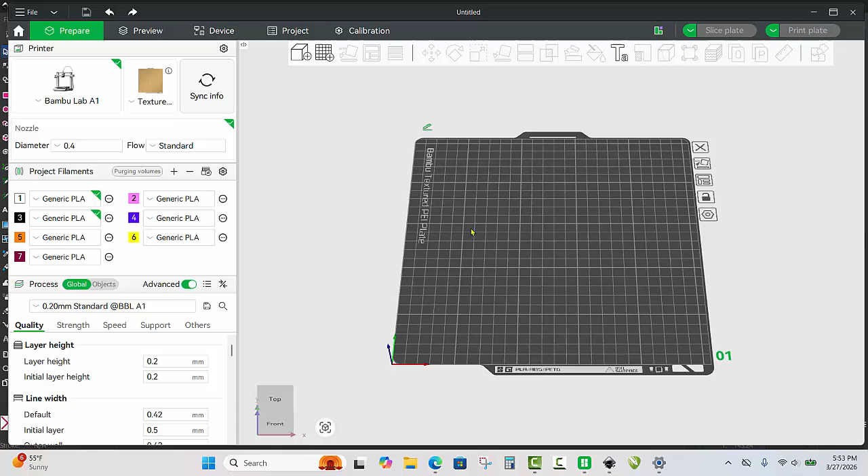All right guys, we are in the mystical, magical Bambu Studio Slicer. Now what I'm going to show you in this video is not exclusive to Bambu. If you're using Cura or Prusa or Orca or Creality Print, whatever, all the slicers work about the same way. So we are going to be importing an SVG file that we created in Inkscape and turning it into a 3D model quick.

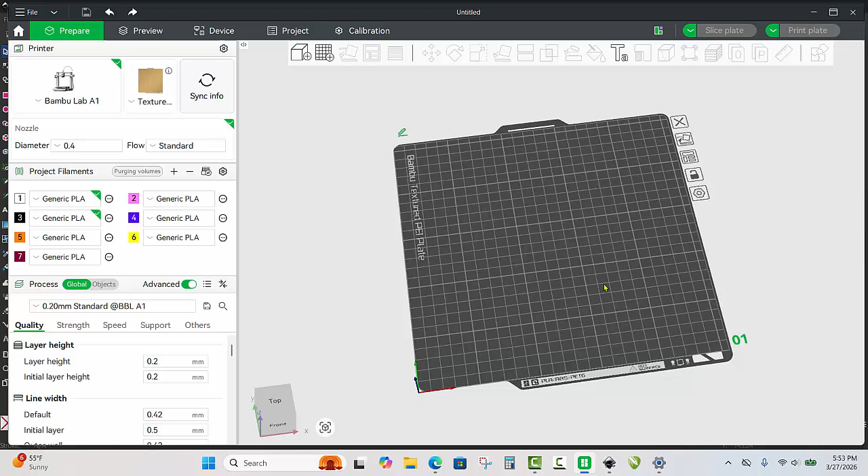Let me show you how it works. We hit Control I here in Bambu Studio. We go to our desktop. We find our file that we just created. Where is it? Hummer Keychain. There we go, there's our Hummer Keychain.

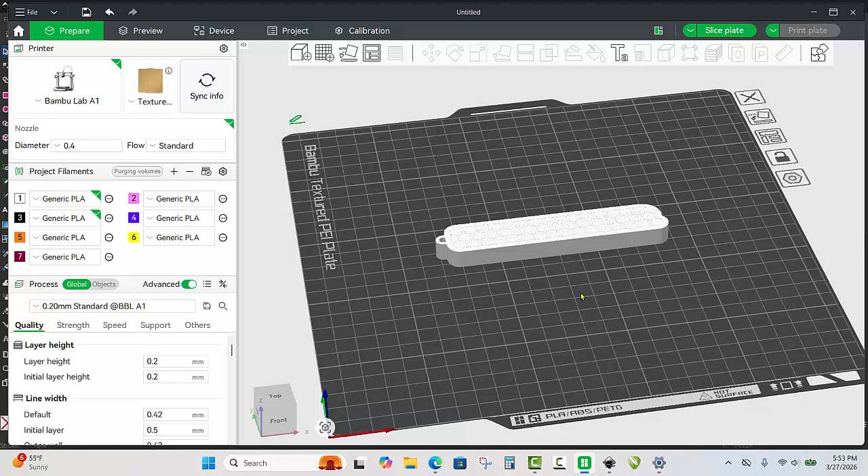Now it's going to come in all one color, which is pretty awesome. It's going to come in 10 millimeters thick, which is pretty awesome. And what we're going to do is we're going to go through and set all these pieces up and turn it into a 3D model lickety-split. All right, so let's go to the Objects tab.

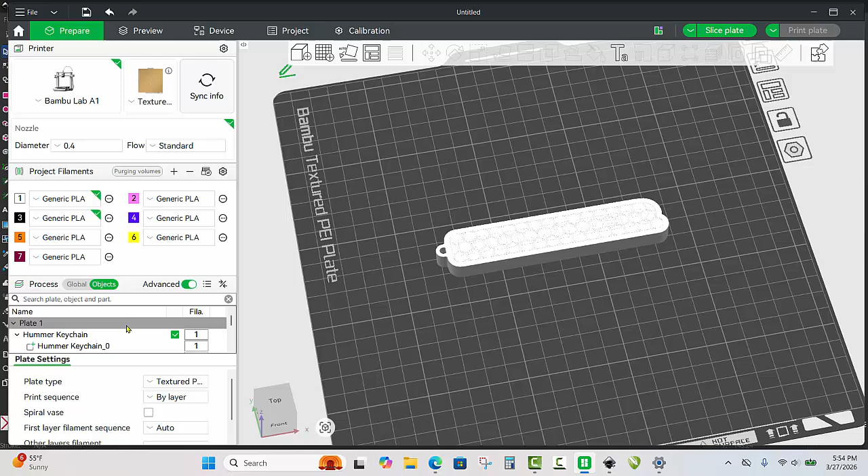Now we know in our design we just have black and white, so we've got that pretty well covered, right? So that first object, this is the part where we have to use our brains and say, well, what is it exactly we want to do? So we have to have a good idea of what we want to do. But the first object is called backplate. Okay, boom. And how thick do we want our backplate?

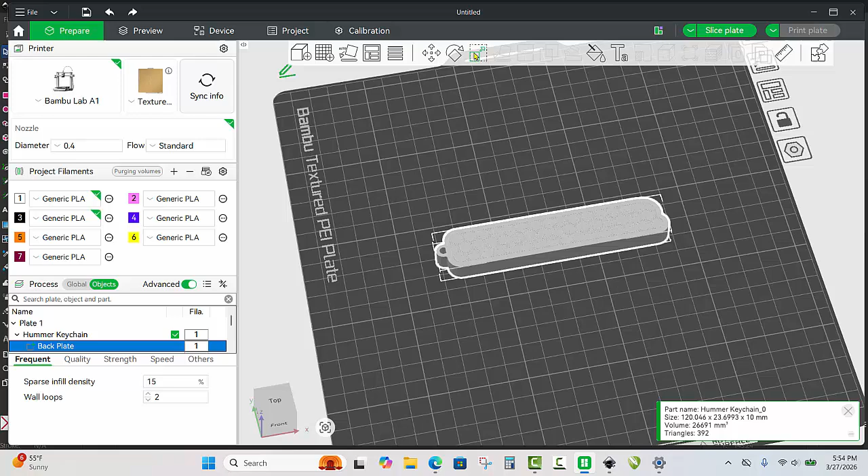Well, I'm going to turn off uniform scale. We want our backplate, in my opinion, 2 millimeters. You'll see if that's good or bad here in just a moment. It is going to be white, so we're good to go there.

Now the next piece is our border. Okay, and I'm going to say 3. I don't know exactly how thick we are actually going to do it, but let's just say 3. And the border is going to be white as well. So we can call this border, just go ahead and click on it and rename it border.

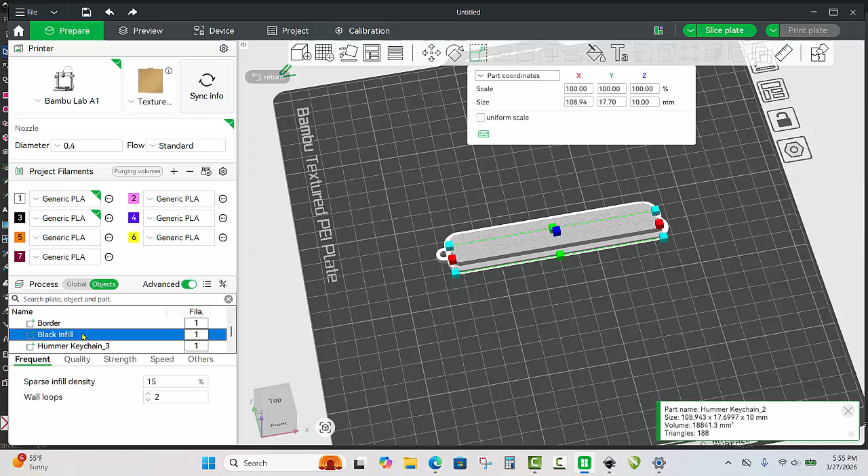Okay, and then the next thing that we have is our infill. Now the infill is going to be, so let's call it black infill. Okay, and that is going to be probably only 1 millimeter. Again, I don't really know, but let's just call it that. And then for our text and the black infill is in fact going to be black.

And then our next part is the honeycomb. So there's the honeycomb. Boom, and it's going to be black. So I hit 3 on my keyboard. Why 3? Well, because that's the third defined filament color. And then its thickness, I don't know, let's just do 1 for funsies.

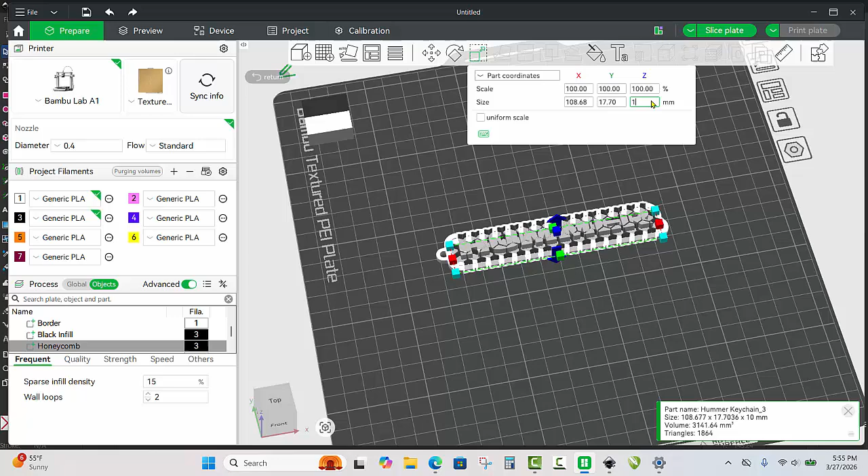And then finally we have our Hummer keychain text. So there's Hummer, it is going to be white. And let's make it 2. Let's make it pop goes weasel. Okay, we're going to make it just a little bit thicker. Now this is what we got.

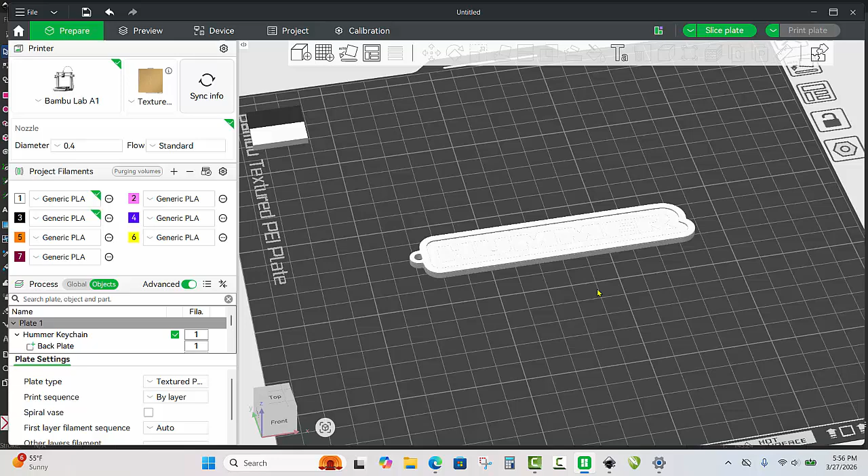A big old mess. So we have to figure out exactly how this is all going to work in regards to your Z heights. So you really have to know what you're making in order to be able to create the model for it. So understand this.

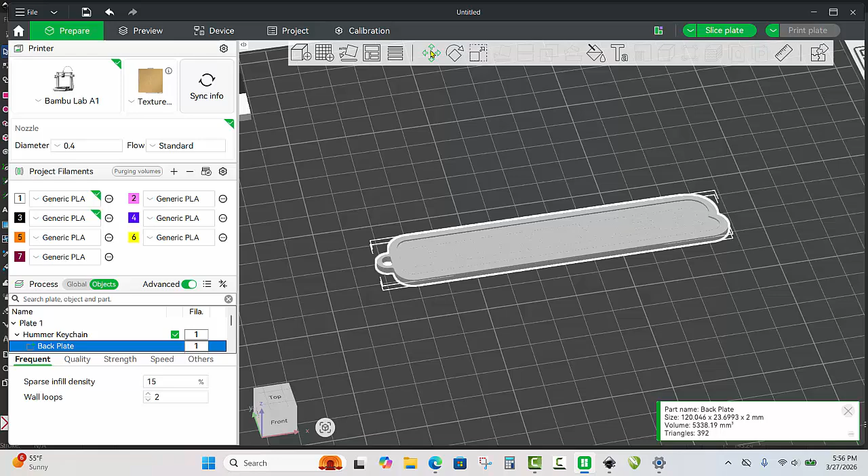For the backplate, we want that to be sitting on the build plate. It is 2 millimeters thick. Half of 2 is 1. That is our Z value. So if we go to move and click on 1, boom, that is sitting on our build plate.

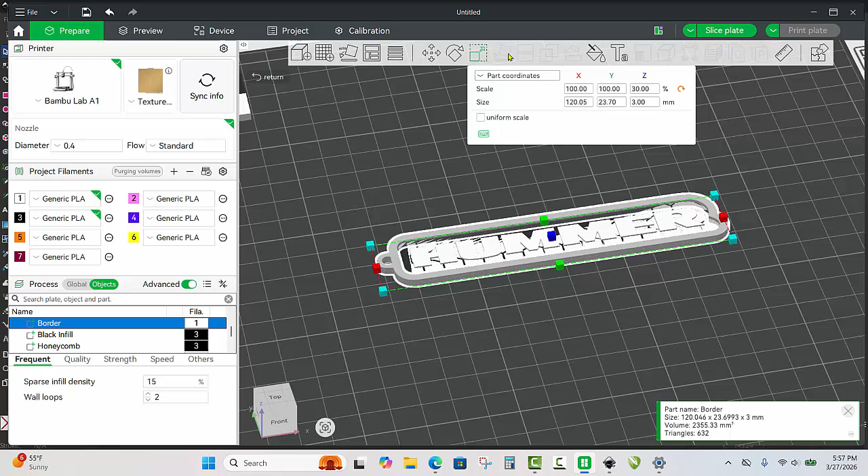Okay, so what's next here? The next is our border. Well, how thick do we want our border to be? So we got to go back to scale. Remember, we set the border to 3. Half of 3 is 1.5. If we want it to sit on top of our backplate which is 2, 2 plus 1.5 is 3.5. So our Z value would be 3.5 for the border.

Boom, so now you can see we got a nice thick action going on here. This is looking good. All right, so keep it going.

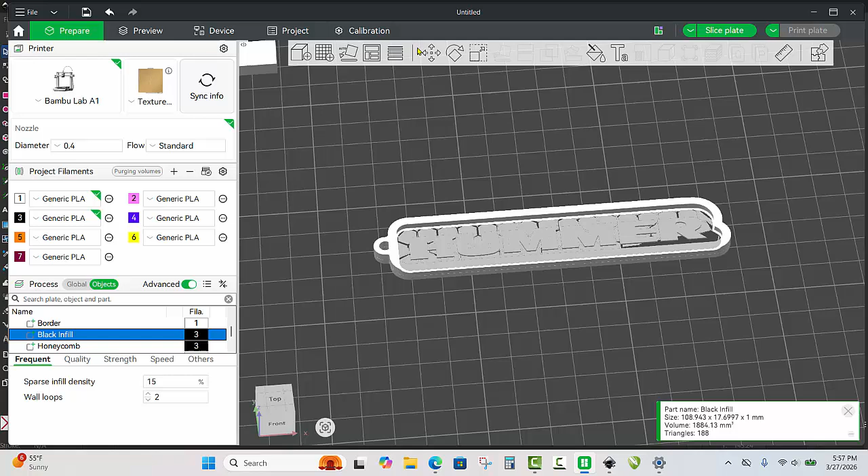Our black infill, where do we want our black infill to be? Well, I want my black infill to sit right on top of my back plate. My back plate is 2 millimeters thick. My black infill is 1 millimeter thick. Half of 1 millimeter is a half a millimeter. Plus the 2 millimeter back plate? Yes, correct. The Z value should be at 2.5.

Okay, I know this concept is a little bit difficult to understand at first, but once you get it, boom, you're going to be magical. Okay, so now you see how it's... we're building, we're building momentum here.

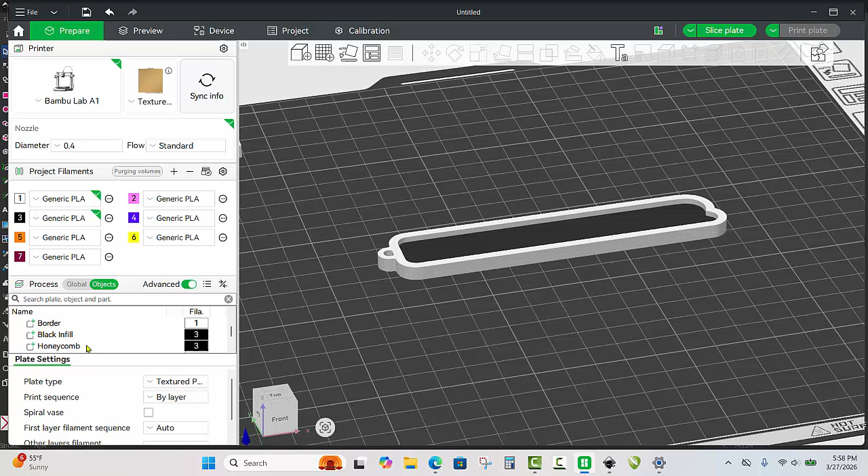Okay, so now comes the honeycomb. The honeycomb is 1 millimeter thick, so half of 1 is 0.5. But keep in mind what the stack is: a back plate of 2, an infill plate of 1. 2 and 1 is 3, plus the half of our honeycomb, so our Z value should be at 3.5.

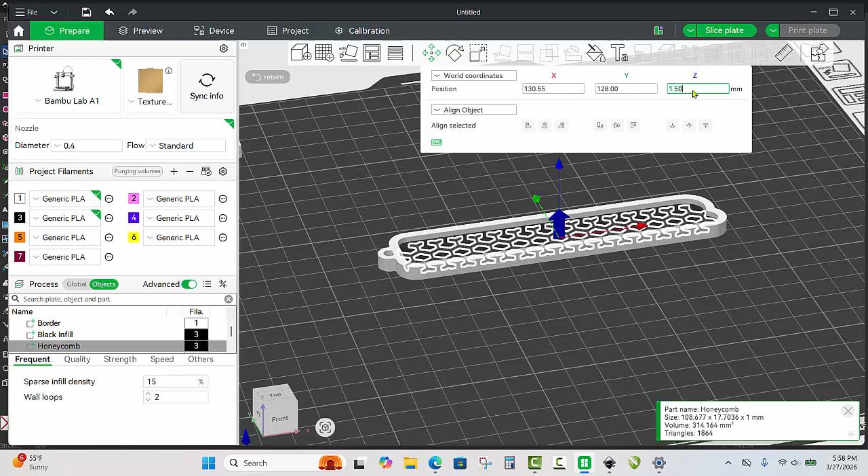Boom. Okay, and now if we look here, ooh, isn't that pretty? So you see how she's building up, building up, building up. Bingo, that's what we need.

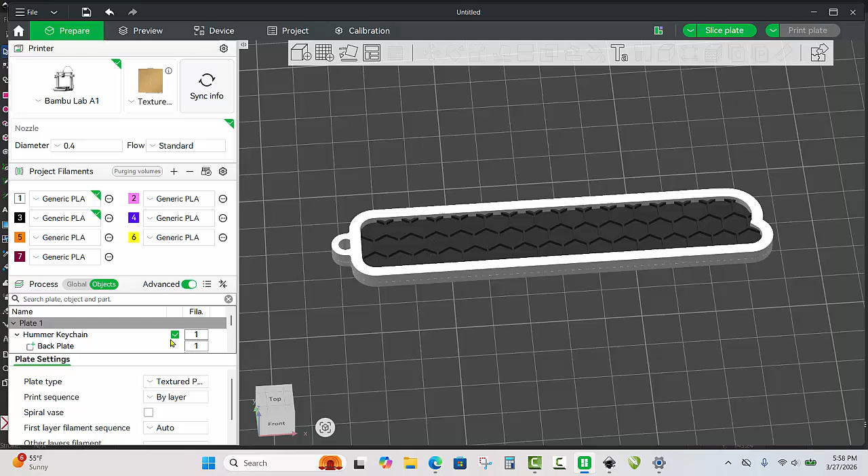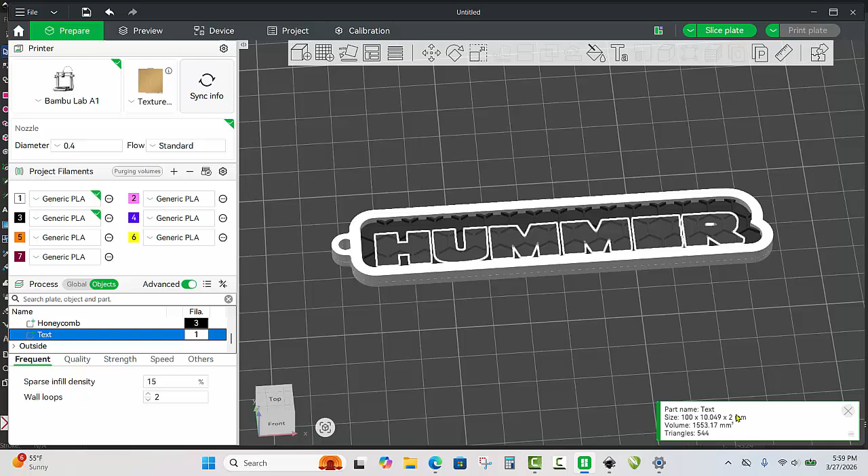Looking good so far. Now finally we have our text. The text, I said we're going to do 2 millimeters thick. Half of 2 is 1. But then we have to go back to our stack and say, okay, what do we got? We've got a 2 millimeter back plate, a 1 millimeter infill plate, a 1 millimeter honeycomb plate. 2 and 1 and 1 is 4, plus the 1 millimeter from our text is 5.

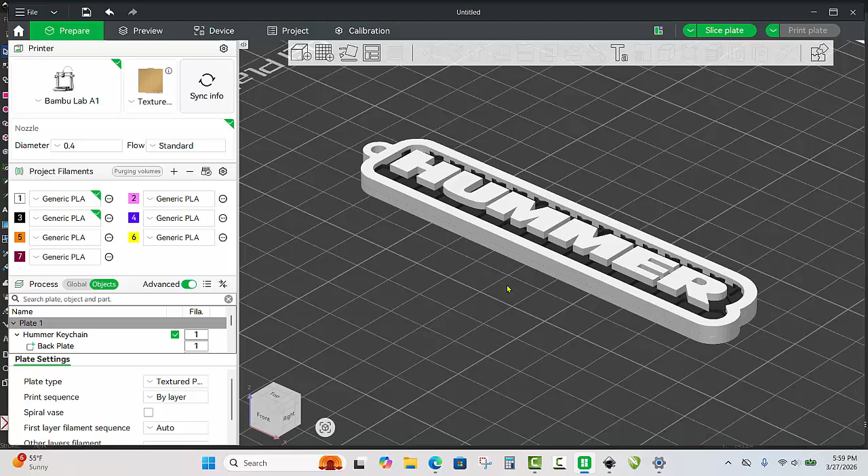Bob's your uncle, let's do 5 for Uncle Bob. And looky there, she's all sitting pretty. You'll see that the Hummer text is slightly proud of my border. That's actually how I wanted mine. You can have yours however you want, but I just wanted it slightly proud. Isn't that just special?

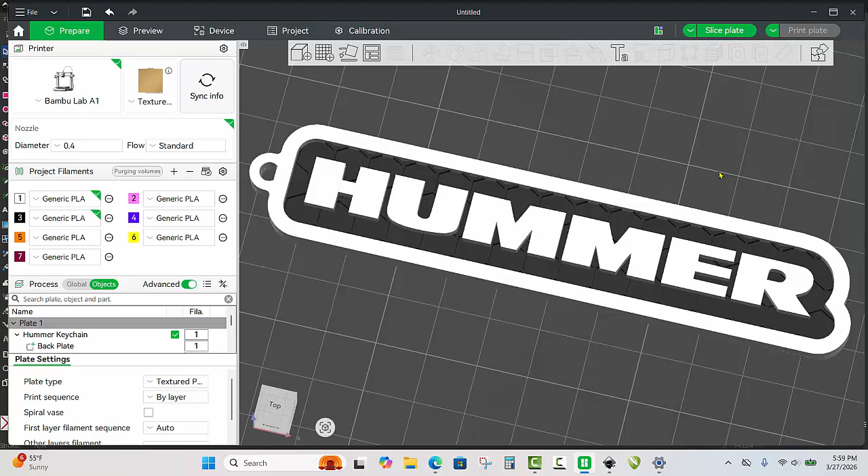So you can see we've got our place for our jump ring, and our edge of our design is nice and perfectly straight, top and bottom. But basically it's exactly the same keychain. Exactly the same keychain. All right, so now you know how to make it all happen.

All right, let's go ahead and slice this bad boy. So let's go ahead and slice it. Make sure... ooh, that was quick. You see here it says slice okay, so it says we're going to get by without any supports, so we'll trust our slicer.

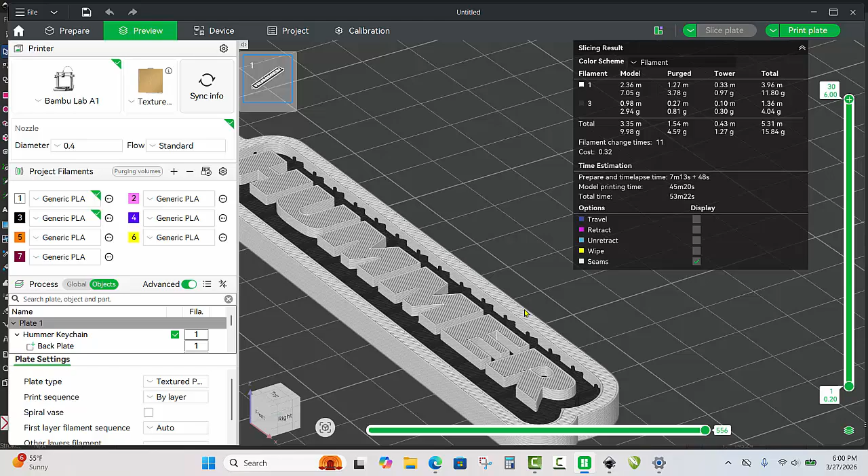It's a little bit hard to see, but you see that honeycomb pattern behind our Hummer text there. I think that looks pretty good. It's there, and it's going to look good. So yes, that is how that works.

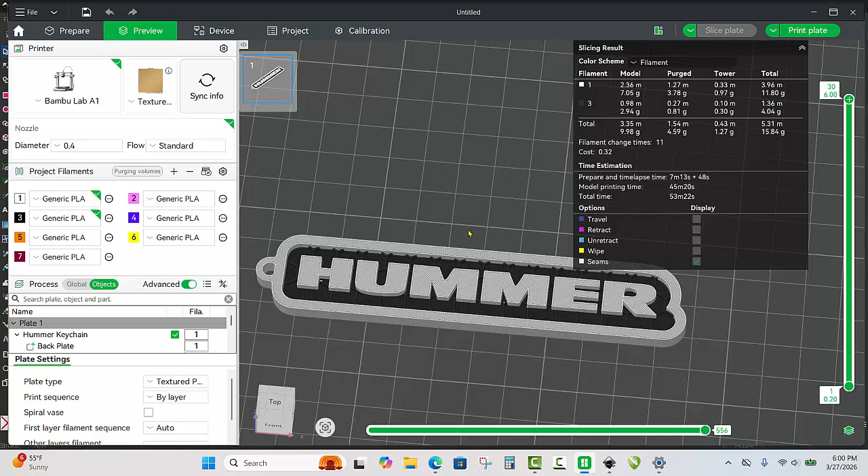So what I would probably do, let's go back here to the prepare tab. What I like to do when I'm doing these keychains is I just put it down here in the corner and just paste. This is just how I like to do it. Okay, so we'll go ahead and get rid of that one.

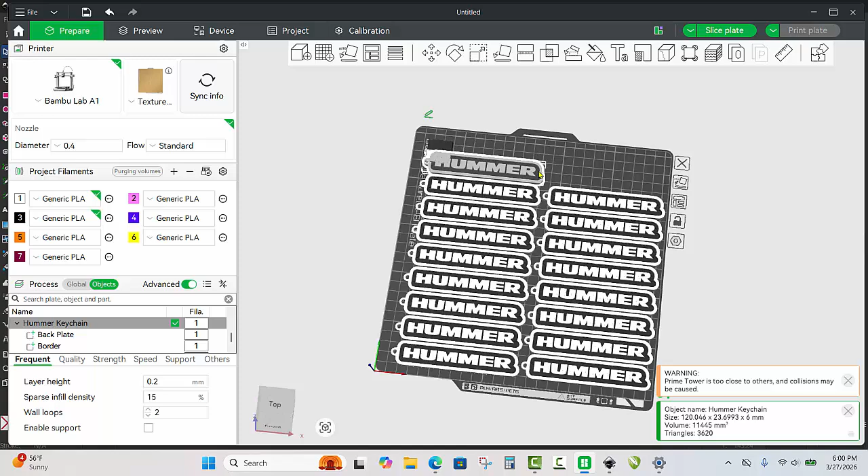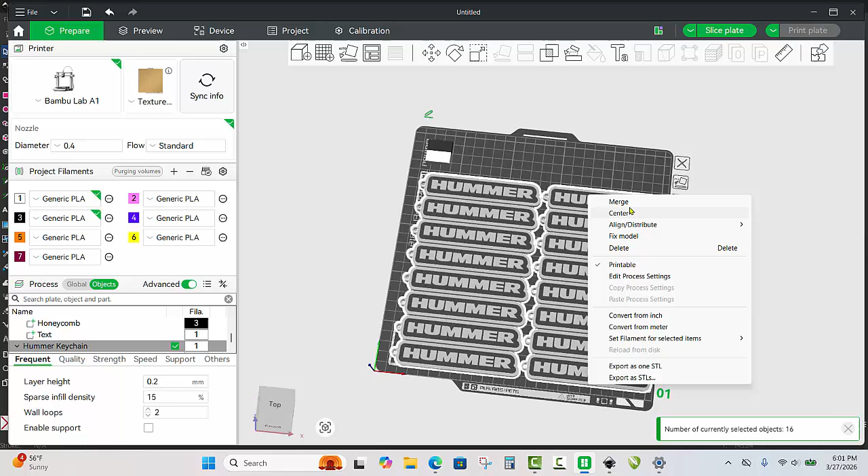There is actually a tool that if you just had one and right clicked, you'll see it has the option to fill bed with copies, but it doesn't make it all nice and perfect like it does when you do it this way, so that's why I don't like using that. But anyhow, we'll center this up. We'll have to move it down because our purge tower is in the way, but it's centered left to right, and there you go.

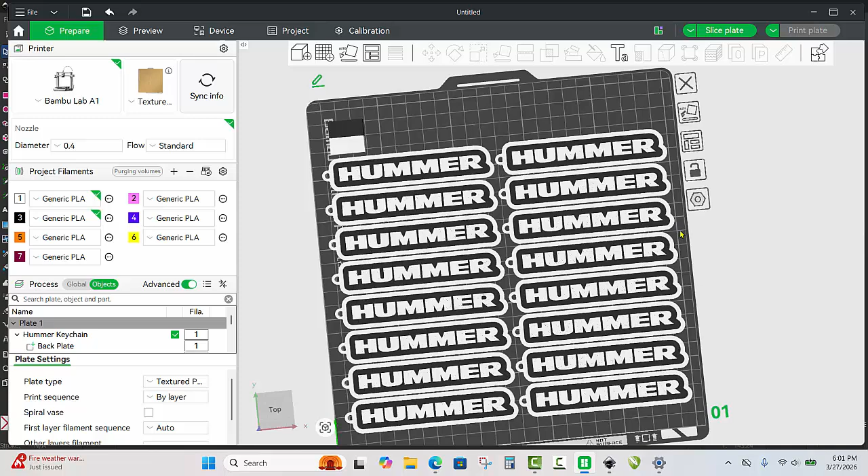You can print out a whole bucket load of these things. All right, and that is how you go about creating your Hummer keychains. Not complicated. Understanding Z heights can be a little bit tricky, even for me. Done hundreds of files now, and sometimes I don't quite get my math just straight, but I'm just popping those numbers off the top of my head. So sometimes I have to move it up and down a little bit, but we get there pretty quickly.

So that's it, guys. I hope this helped you understand how to go about doing that a little bit better here inside your slicer. Really encourage you to really understand your slicer inside and out and backwards. That's step one when you're starting to learn 3D printing. What can we accomplish here in the slicer?

What we cannot. And then some type of graphics program that can save an SVG - it could be Illustrator, CorelDRAW, InkScape, Canva. Well, maybe not Canva, because Canva doesn't export a really good quality SVG. That's the problem with Canva. But a lot of people will use Silhouette Studio because they're used to using a vinyl cutter, their Cricut machines and things like that. Silhouette Studio will export an SVG, and it's usable here inside Bambu Studio also.

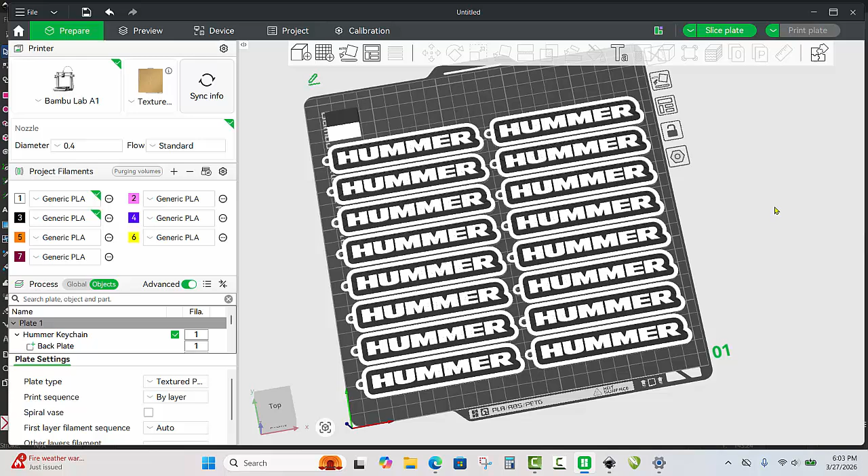But there's one caveat to using Silhouette Studio: you have to go from Silhouette Studio to Inkscape to Bambu Studio. You cannot go straight from Silhouette Studio to Bambu Studio. So there you go, that's all the information I know. I hope this helps you out. Until next time, thanks for watching.